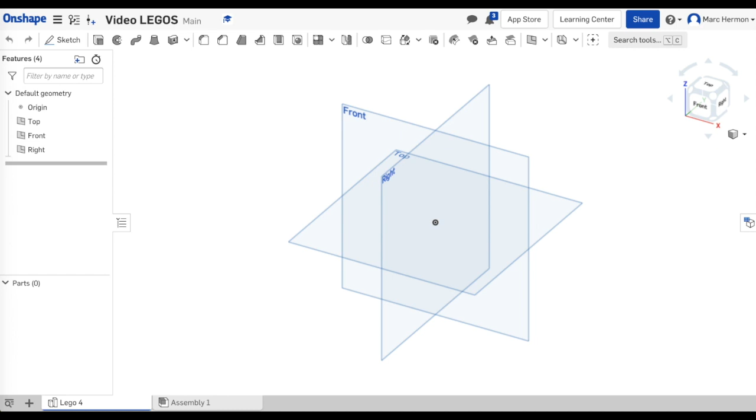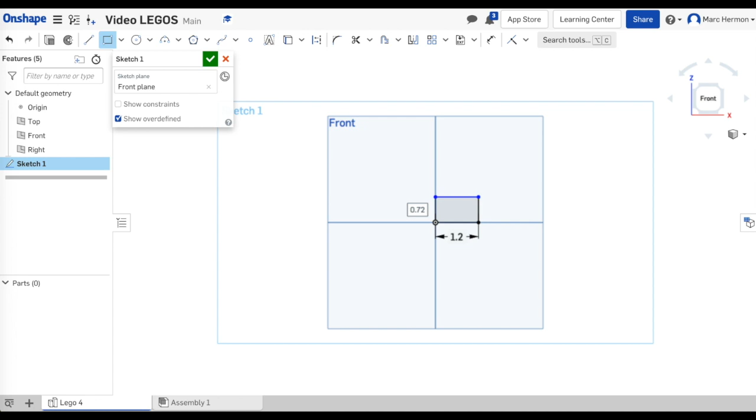Okay, so I'm going to do a sketch. I'm going to click on here, right click, and view normal to. I'm going to make a rectangle and put that in here. This is going to be 1.20 long, and the height of it is going to be 0.37. Okay, we'll do that. We're going to extrude it, and the width of it is 0.6. Okay, so there we go.

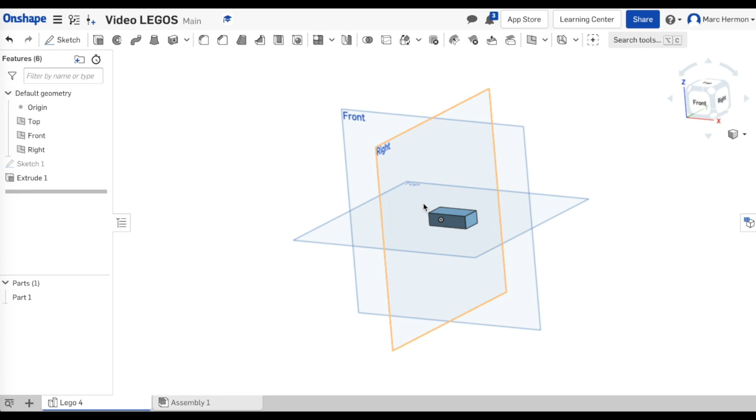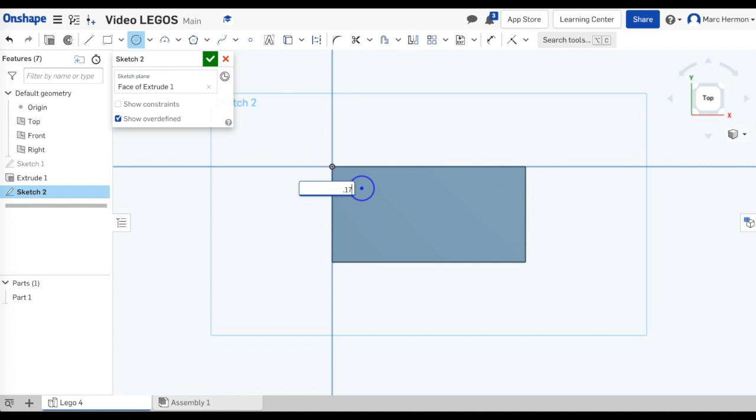We got our brick. We're going to go on a sketch on the top. We're going to make all the little nubs. I'm going to right click, view normal to. Okay, I'm going to make a circle. Come out here a little bit more. So the diameter of these are 0.17. And then I'm going to dimension it. From here to there is 0.15. And then from here to here is 0.15.

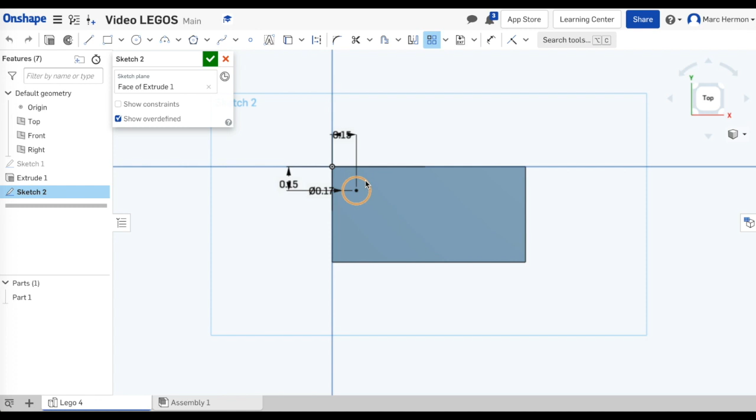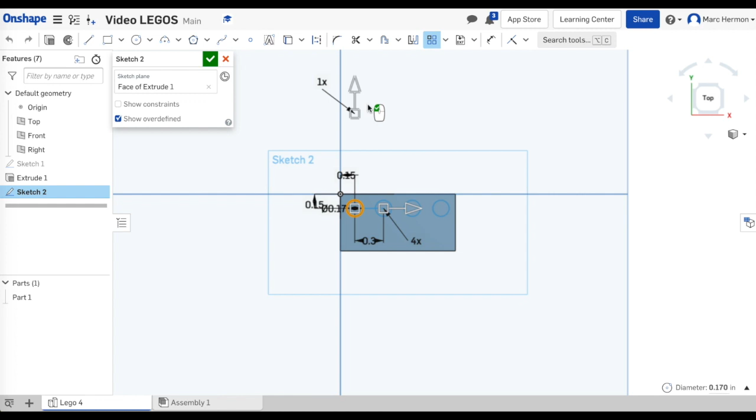I need this linear pattern, and I'm going to select this, going over here to the right. I want it to go, click on this one, and we want it to go 4. We want 4 of those. We don't want an inch between them, we want 0.3 between them. And then downwards, okay, we want it to go down. Click on this, this should be negative 0.3 between those. So we have them all on there.

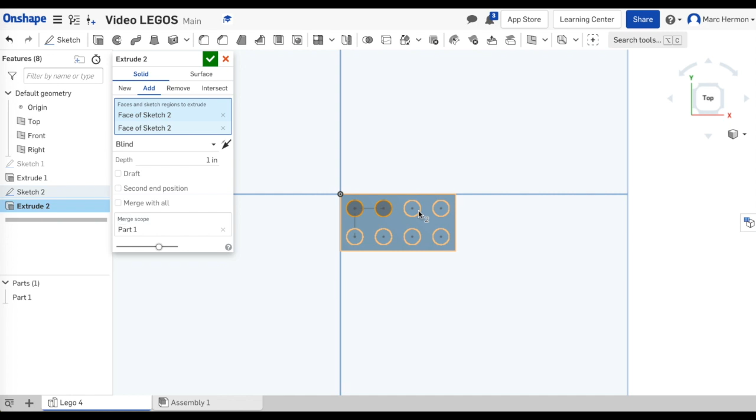There they are. Okay, extrude those. And they are going to be extruded up 0.07.

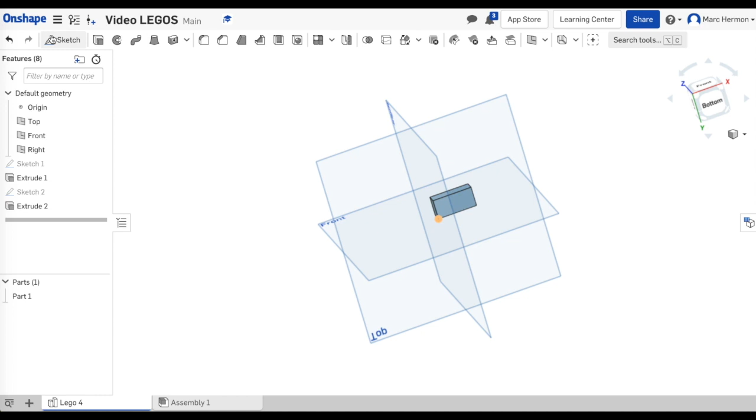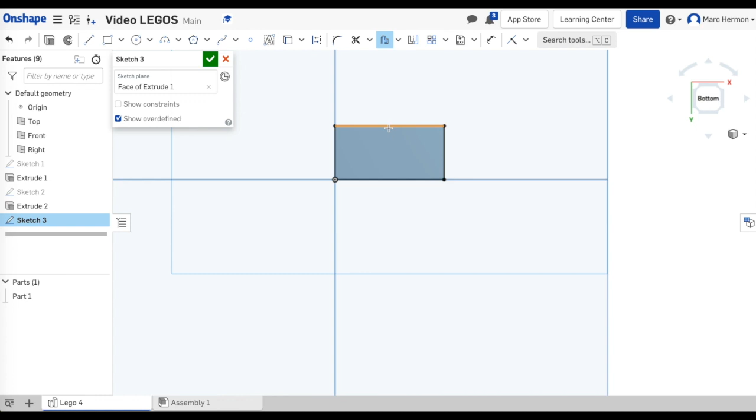All right, let's go ahead and do the bottom now. We're going to sketch on here like that, and right click, view normal to sketch plane. First thing we're going to do is make a rectangle border here on the outer edge. And then we want to offset that. So we're going to click and select all of these edges here so it makes an offset box in the middle. And then we'll click on that, and do 0.06. That'll be good.

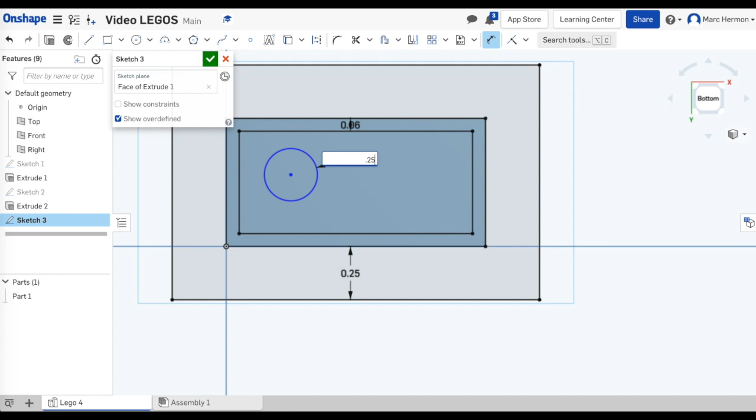Okay, now we want to click some circles, and we're going to put this out here. Let's see, dimension this is going to be 0.25, and then another circle is going to be 0.20. And then we're going to dimension that from the outer edge to here is 0.3.

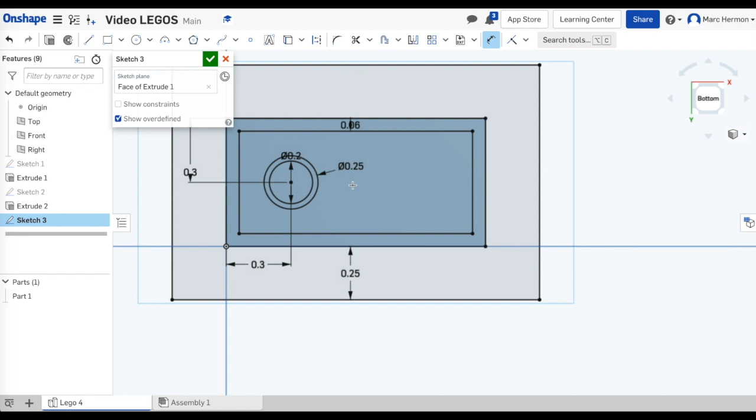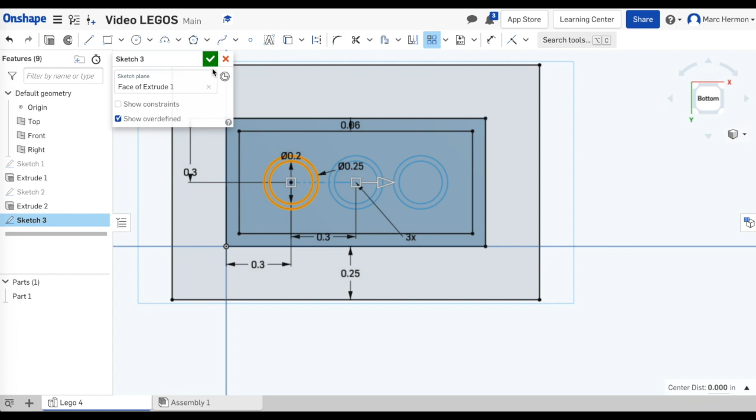Okay, and then we're going to linear pattern this, this, and this. Click on this, this is only 0.3 apart, and 3 times is good. And we just want it once there. So I think that's what we want, that's good. Okay, it's all good.

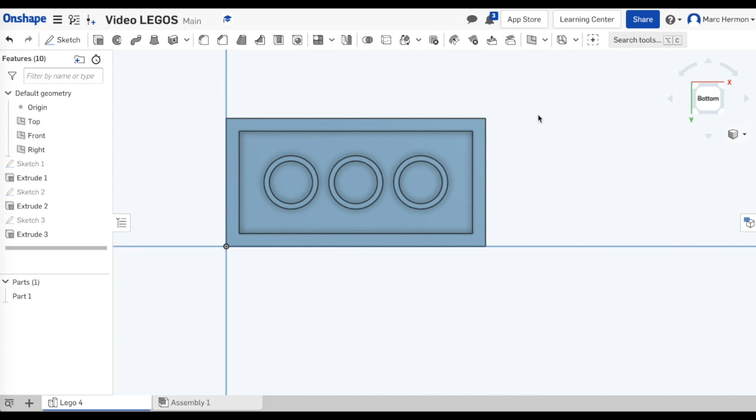All right, so now we're going to extrude, and we're going to actually click this part here and each of the centers, and we're going to remove. Make sure you have it on remove, and we're going to go 0.34. Go in there, let's see, are we good? Okay, I think we got it.

So now what we're going to do is we come down to Lego 4, we're going to duplicate this, make a copy of it. Now I'll rename this, and we're going to call this Lego 3.

Okay, so really all we have to do is come in here and let's edit this first sketch, edit. Still want 0.37, but instead we want this one to be 0.9.

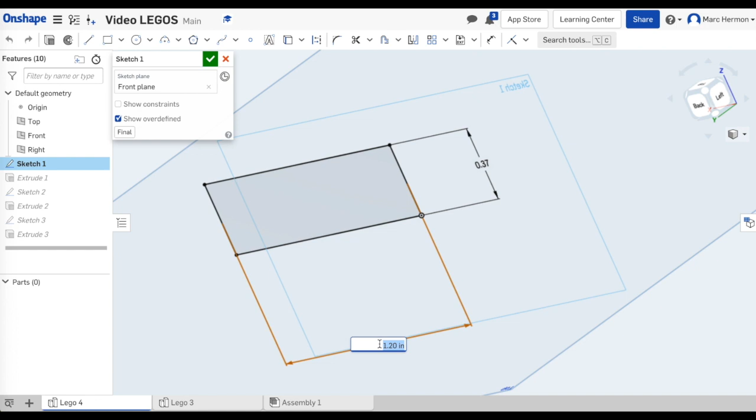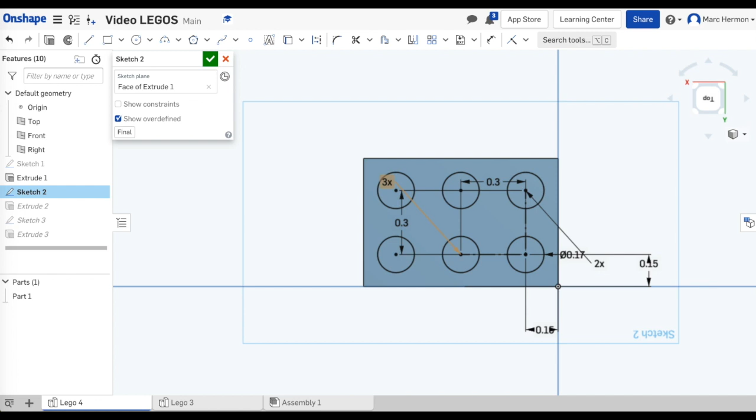We can finish that. And then sketch 2, we did all those top things, edit. Let's look at it from the normal position. Still want that too. Right here, instead of 4 times, we want that to be 3 times, and that'll fix that. Okay, and then the last sketch on the bottom, we want this to be 2 times instead. There we go. Okay, and save that, and that should be it.

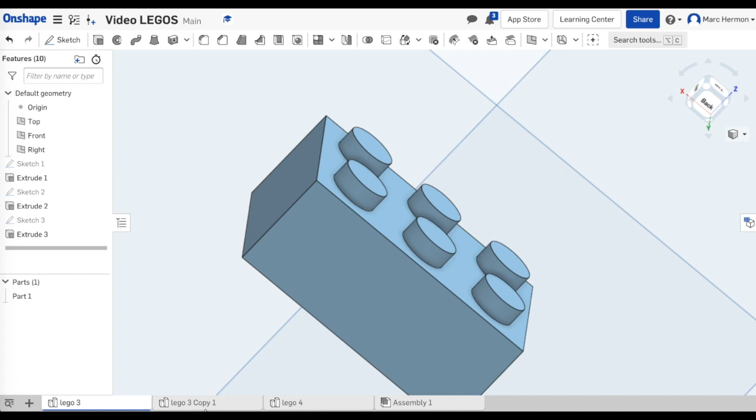There we go. Okay, so I'm going to be on Lego 3. I'm going to duplicate, and come over to here, and rename this Lego 2. Okay.

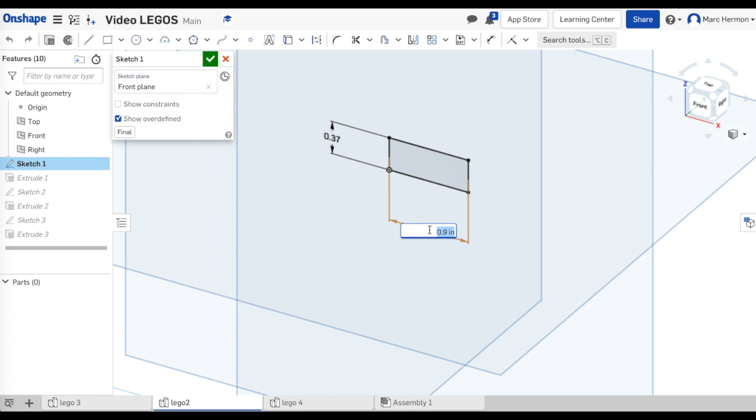So we're going to edit sketch 1 again. And instead of 0.9, now we're just 0.6. And if we edit sketch 2, we want, instead of 3 times, we want twice. Good, let's get on that one. And then sketch 3.

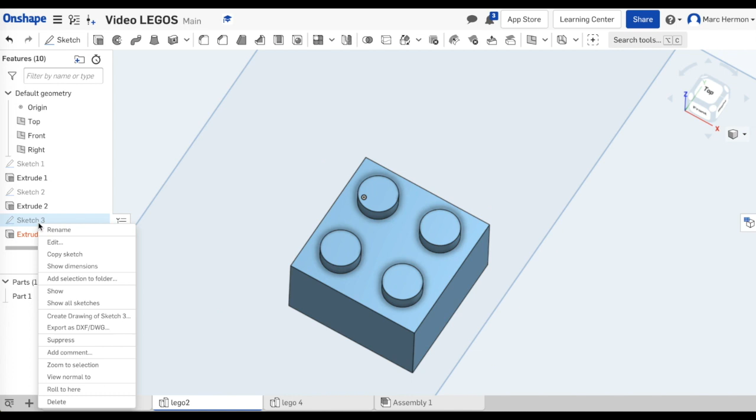We just want this one time. Good, and got that. There's our Lego 2 piece. Okay, so now we got Lego 4 piece, Lego 2 piece, Lego 3 piece.

Okay, we need to duplicate this Lego 2 part. So we're going to duplicate that. Click on that duplicated part. We're going to rename this one to be a small angle.

The first thing we need to do is delete the top part of this, just delete the little knobs off the top, the extrusion and the sketch. We need to go down and edit the last extrusion, and instead of going 0.34 in, we only need to go 0.12 in.

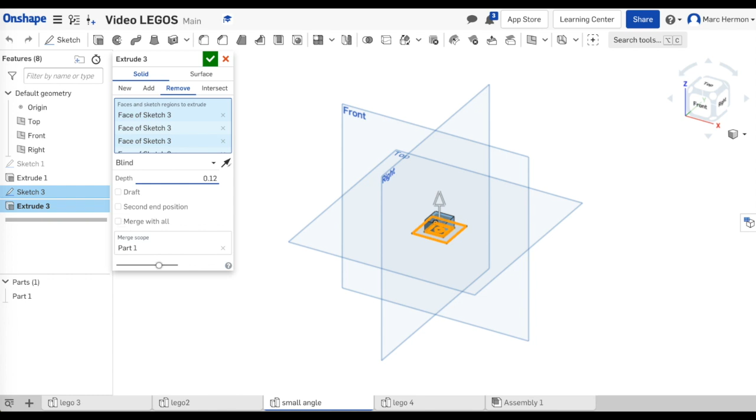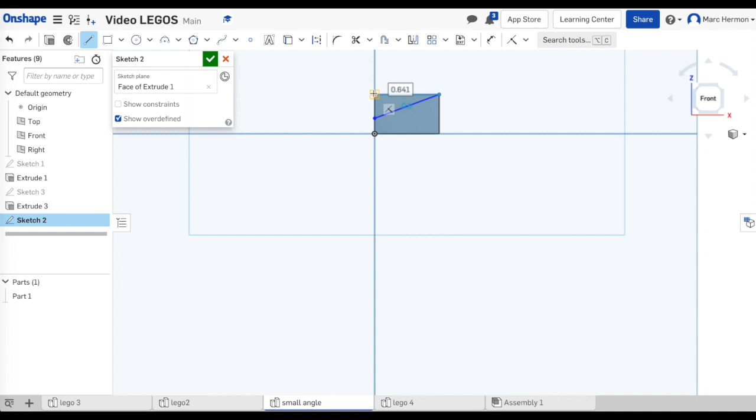Okay, and then we need to make a sketch on the side here, and we'll view normal to the sketch plane. We're going to do some line tools here, starting in here a little ways, go up to that corner, over this corner, back down to there. Click a dimension. We want to dimension this point here, that needs to be 0.12.

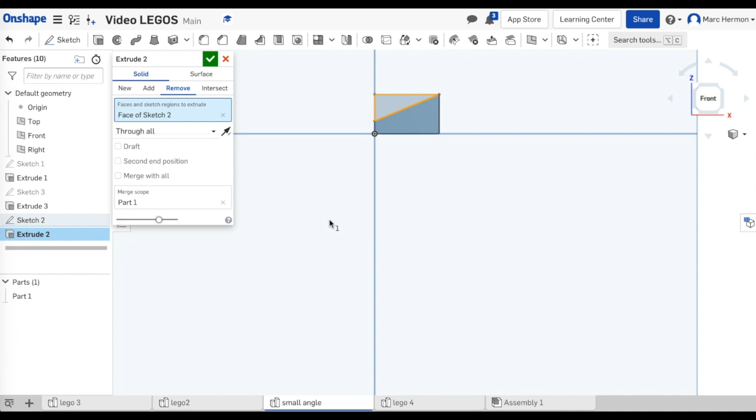Okay, and then we're going to extrude. We're going to remove all the way through all of that right there. And there we go, we got our small angled piece.

All right, we're going to do the large angle piece, so we're going to use the Lego 3. Click on the Lego 3, and we're going to duplicate. Then we'll click on that and rename it. We'll call this one large angle.

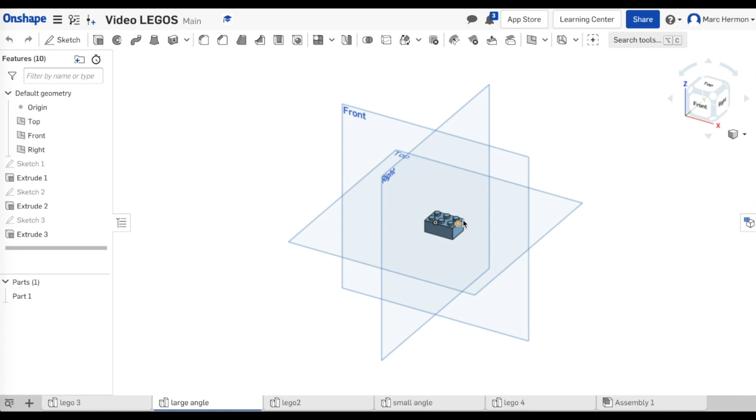And then let's see, we do need the things on the top, but we don't need the things on the bottom, so we're going to delete the bottom part off. Delete that. Delete sketch 3.

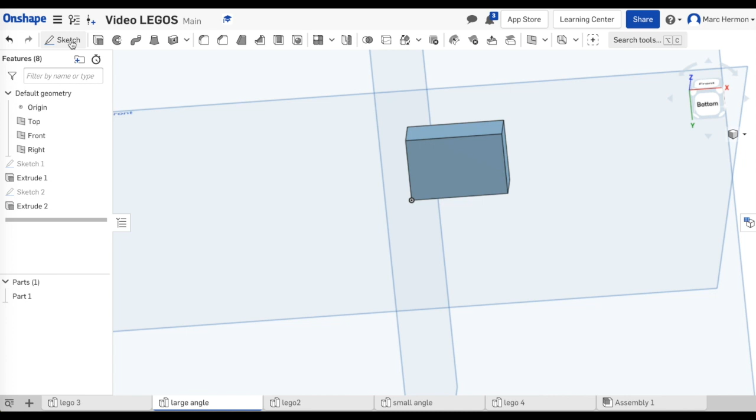Okay, and then we need to turn this on the bottom, and we need to make a sketch on the bottom. Sketch. I'm going to do view normal sketch plane. Okay, I'm going to come in here and make a little rectangle in here.

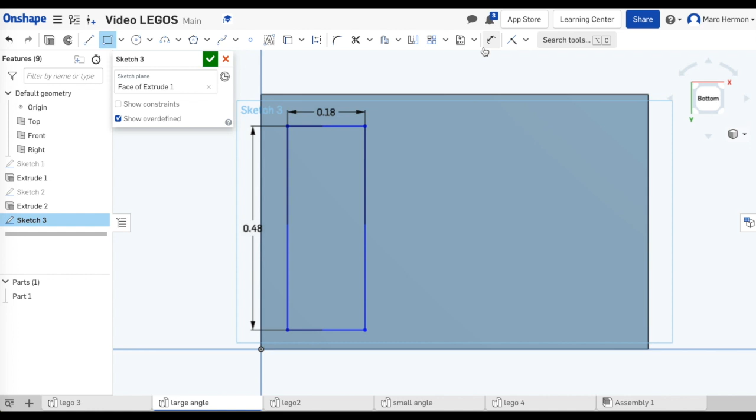And the height will be like 0.48, and then the width will be 0.18. Then I'm going to dimension this. From there to there is 0.06, and from there to there is also 0.06.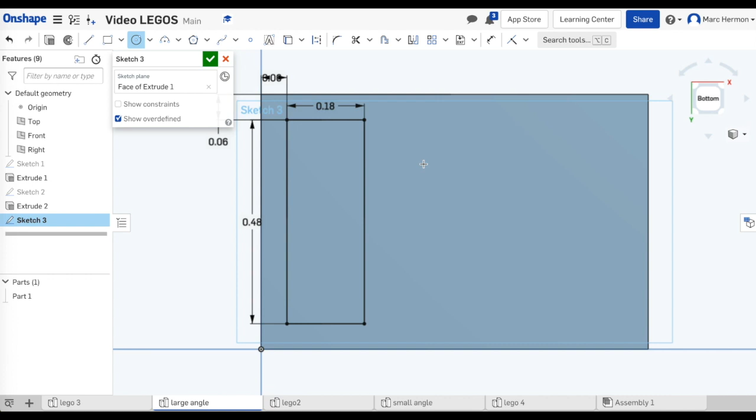Okay, I'm going to get some circles. I'm going to put one right in here. Those are going to be 0.17. Linear pattern that, I guess.

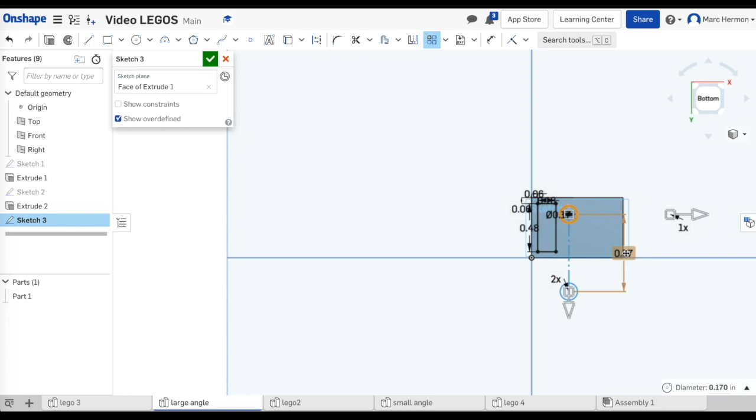This is just one, and this needs to come down twice. And this will be 0.31, or 0.3, negative 0.3 between them.

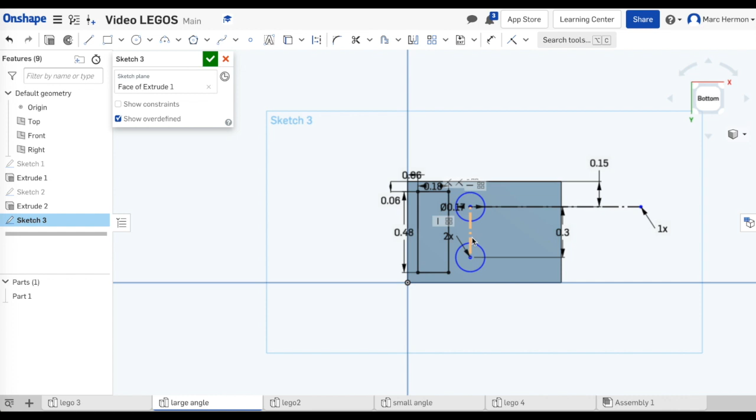Okay, I need a dimension from there to there is 0.15. I think these need to be in the middle though. So this dimension from here over to here, this should be 0.45. Get them in the middle.

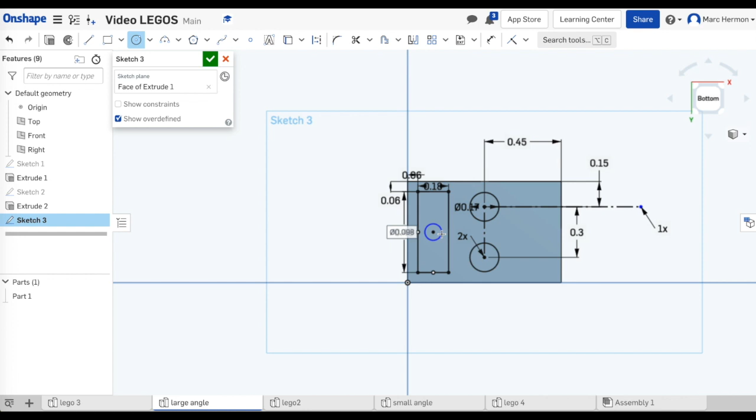Okay, good, I think we got it all. Oh, we gotta put another circle on here, a little tiny circle here in the middle. Let's see, can I find the middle? Yeah, right there. Good, and this is going to be 0.12, I believe. That's better. Okay.

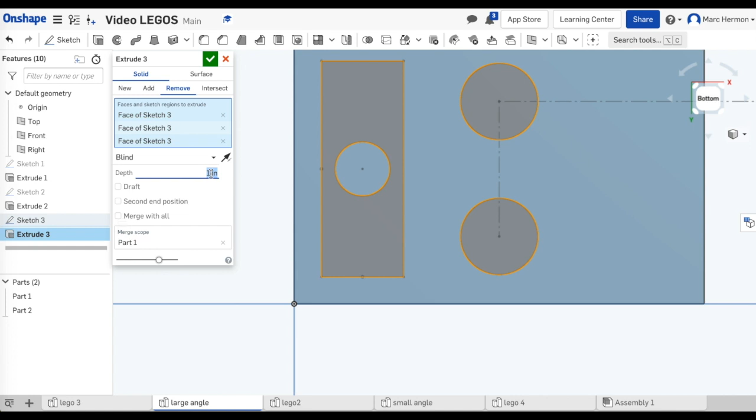I think we need to extrude. Okay, so I think we're done with our sketch there. Extrude, remove this section, this, and this, and we're only going in 0.07. 0.07. I think that should be okay.

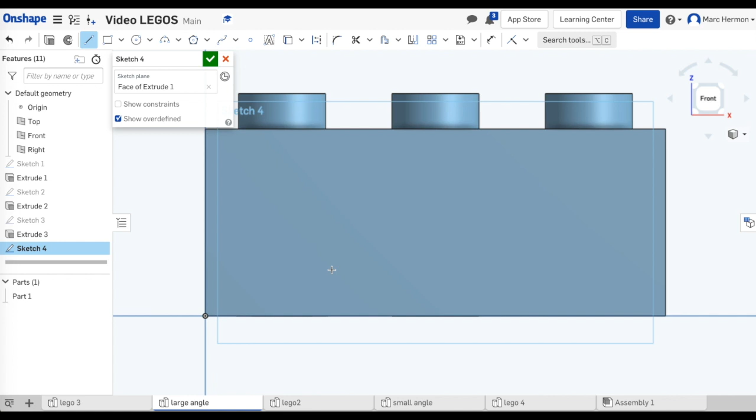All right, so then what we need to do is on the side here, we need to draw a sketch so we can cut some stuff off. We're going to go, well, I'm just going to draw on some angles, or I'll draw on some lines here.

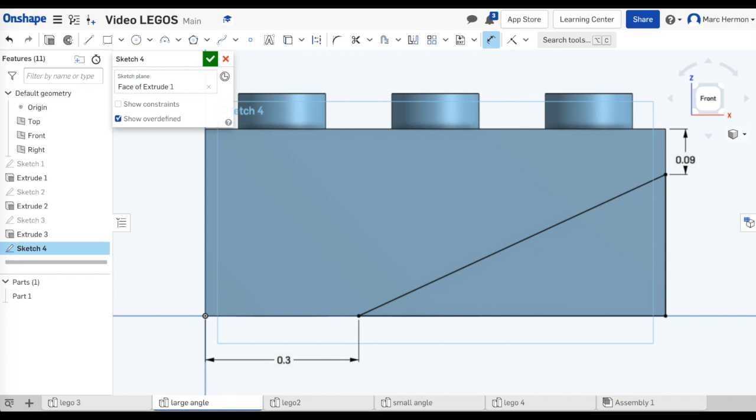Okay, I'll get a dimension tool. From here to here needs to be 0.09. And from here to here, whoops, dimension, there to there needs to be 0.3. Okay, and we can finish that sketch.

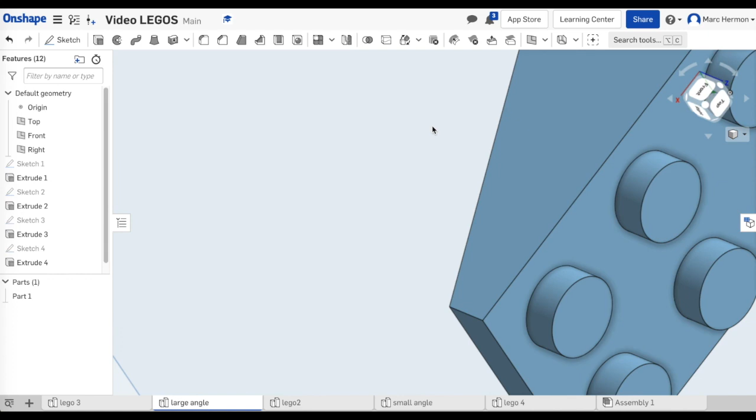And now we can extrude this little section. We're going to remove, and we're going to go through all, save it, and please work. Yeah, it looks pretty good, see it cut right there, nice and neat. And I think that probably is a pretty good piece. So that's the large angle, and that's how to make all 6 pieces.